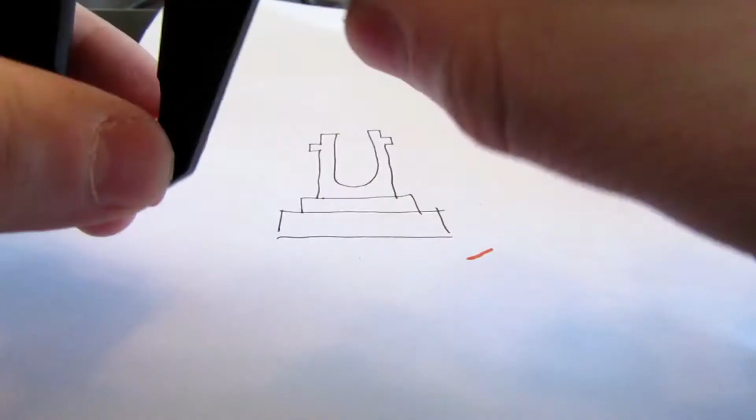I started out by drawing a rudimentary outline of how this piece was going to look, which is really easy to do when you have the original in your hand. Then I started taking measurements at various points using my calipers, and quickly jotted down those measurements onto the picture I drew.

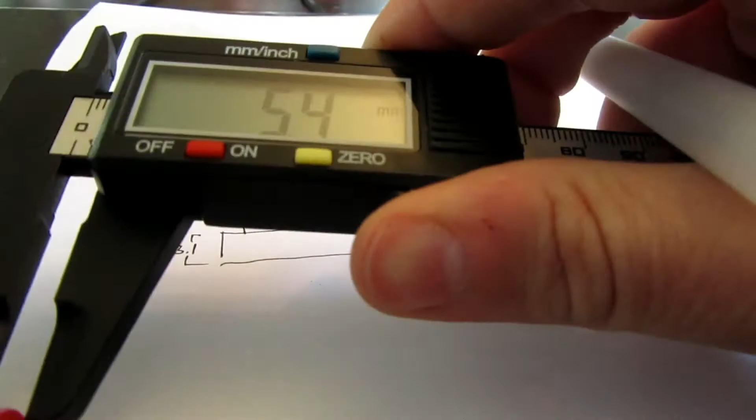Here you can see I had to measure each of the different rings. Luckily this entire piece is essentially just cylinders stacked on top of each other, so it makes designing this piece relatively easy. Just working my way through, measuring each of the different rings, and jotting them down as I do.

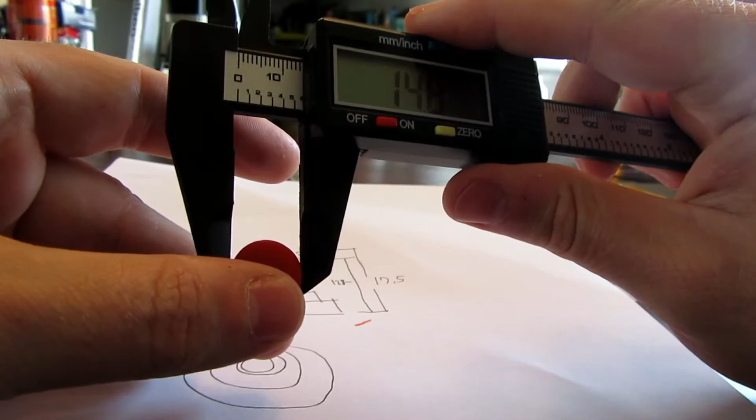Then I realized I need more than a two-dimensional drawing. I actually need to measure the width of everything as well, so I quickly jotted down another drawing and began measuring the rings from the outside. Again, they're primarily just large to small stacked on top of each other, with the exception of the top of the clip where it clips in.

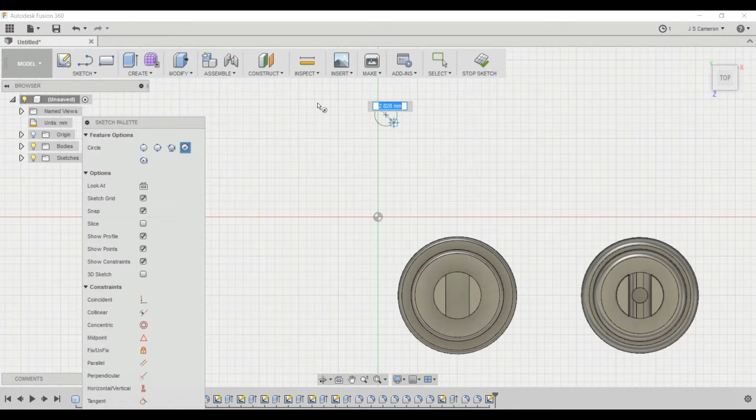So then it was a matter of drawing it out in Fusion. You can see I'd already had a couple of iterations, but essentially this is how it goes. I start off by putting in a single circle, which is going to serve as the base, and then all I have to do is extrude it up to the proper thickness that we jotted down earlier.

Once that's done, we just draw another smaller circle in the middle of that one. As I was saying earlier, because it's pretty much just like a pyramid type shape, it makes this part pretty simple.

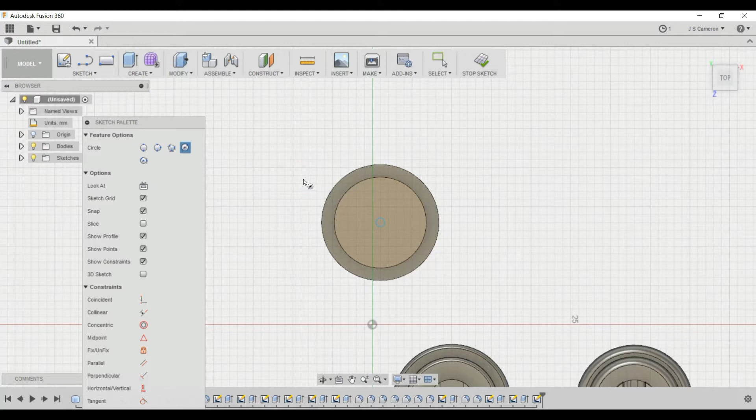Once again, I just extrude to the thickness we came up with before, then a third smaller circle in the middle, and then extrude up to where the clip part of the button is. Just like that.

Then on top of this one, I draw a bigger circle, which is going to give us our clip where it basically extrudes out the side. This is what holds it into the saw once it's fully installed. So with this, I have to make sure I highlight both sections before I do the extrude to get the proper thickness. And there we are. Now we have the bump on the side that'll hold this button in place.

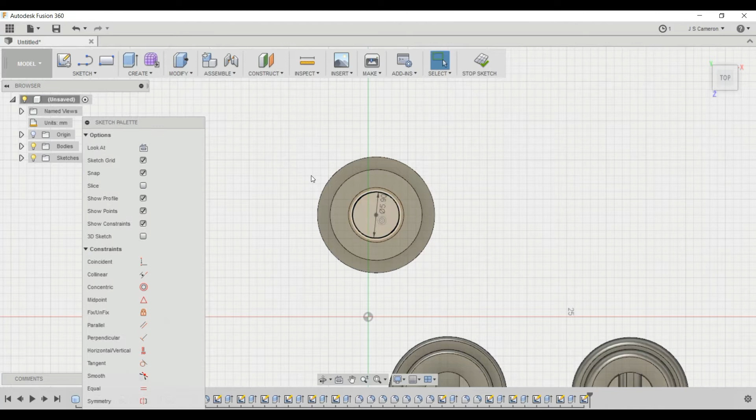At this point, I just draw another circle in the middle, the same thickness as the third circle we did, and then extrude it up. This completes the basic shape without the slot cut in the middle. That'll be the last step we have to do.

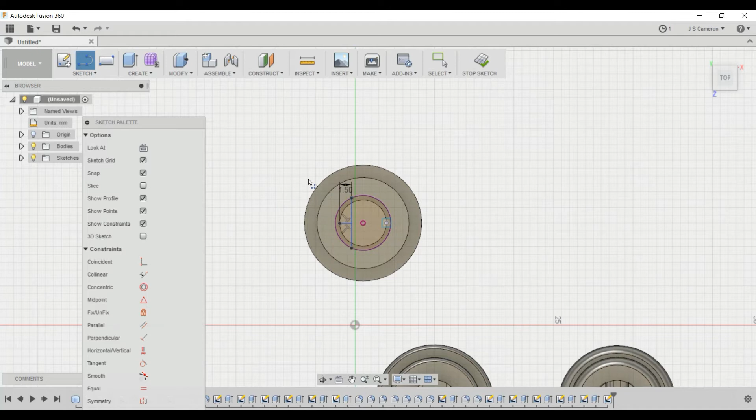So then, knowing that each of the wings is 1.5 millimeters thick, I measure in from the side of the circle 1.5 millimeters, draw a vertical line at that point, repeat the process on the other side, and then all we'll have to do is basically a push versus a pull on the three segments to create the slot that we need.

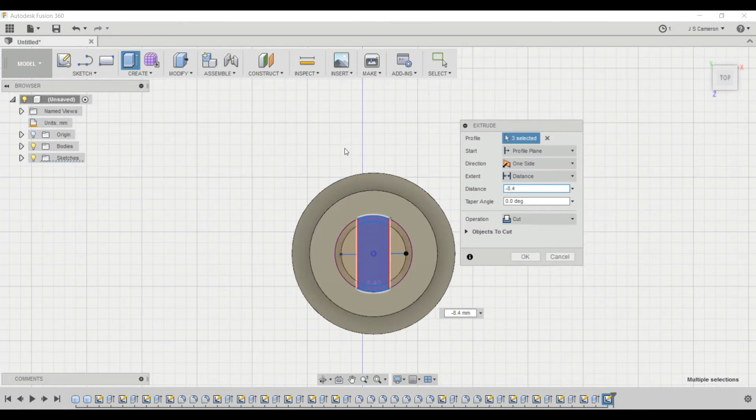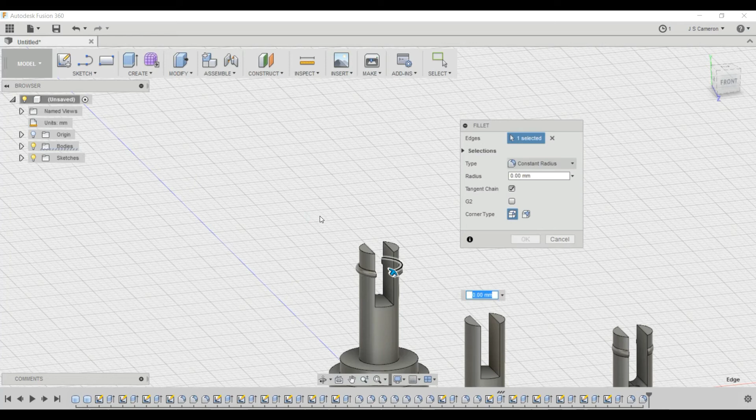As you can see, that gives us the hollow slot. At this point, the basic shape is done. All that's left to do is clean it up and get rid of some of those rough edges. I essentially just had to tap F for fillet and go around the rough edges I wanted to put a curve onto, and then one by one, curve them out to make them look more like the original piece.

And there we have it, a completed piece ready to send to the printer. 3D printing saves the day again. A piece that wasn't really user replaceable, something they didn't sell a replacement for. I was able to just quickly model it up and print it off and hand it off to him. The best part is, I gave him a handful of them because they only weighed about half a gram each. So if he breaks another one, it's not really a big deal. He can drop in a new one, no problem.